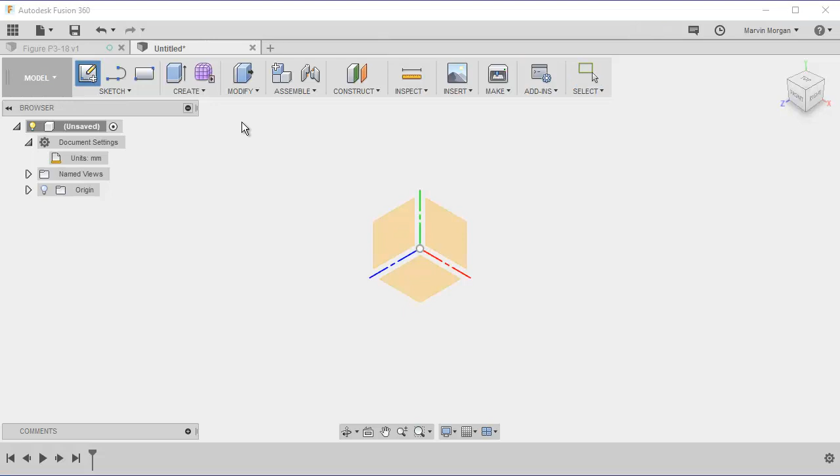Next, we'll begin with the sketch. Our sketch will be on the front face, so I'll click the cube to see the front and select the plane for the front view.

To form this drawing, we're going to begin with a rectangle using the center rectangle option. Our center point will be the origin, and we're going to come out with the box. For the first box to the left, type 60 for the height, hit tab, and do 100 for the width. Hit tab again so both are locked in.

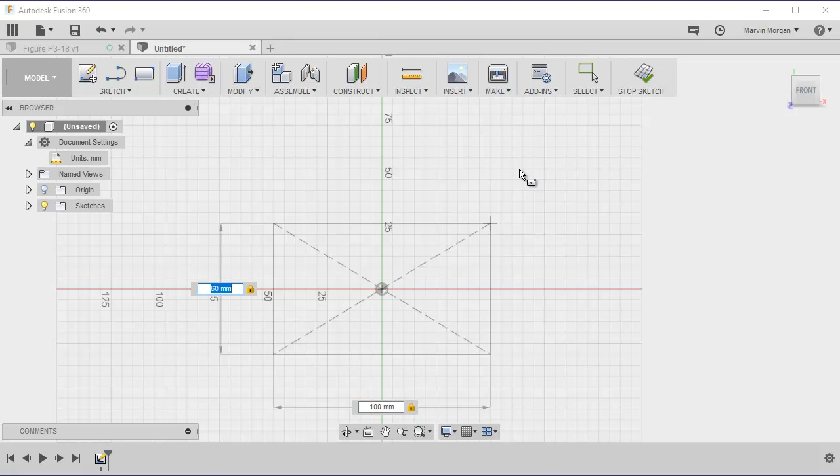I can take my mouse and just click, drawing a line that goes across the image to create that first slope, just like you see in the picture.

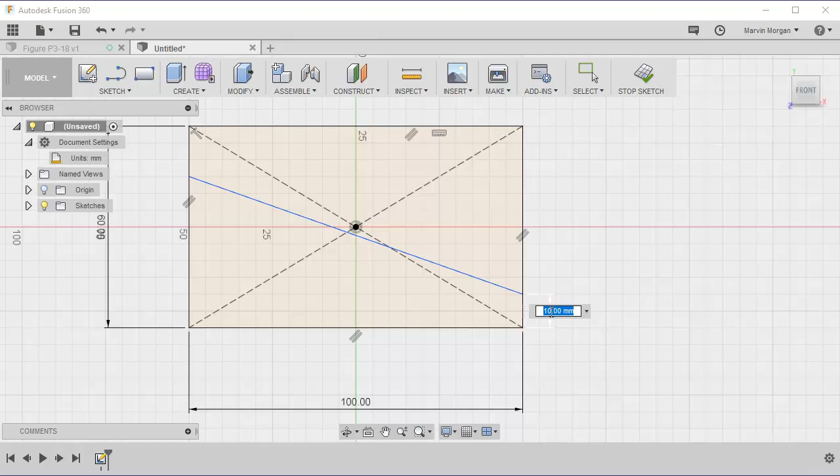Now we're going to use our dimension command to organize this line to make it where it's supposed to be. From this point to the bottom line, it's supposed to be 7 millimeters. Also, this line is supposed to be at 22 degrees from the top line, so I click both lines and put 22 for the angle.

We have another diagonal line that's part of the profile, starting from here and cutting across for the back side. Again, using our dimension, from this particular point to the bottom line is considered to be at 38, and also the line is at 22 degrees as well.

Next, we have 2 circles that we need to apply a point to. I'm going to click on the point and place one point here, and a second point somewhere in that area. Using our dimension command, we'll organize those 2 points.

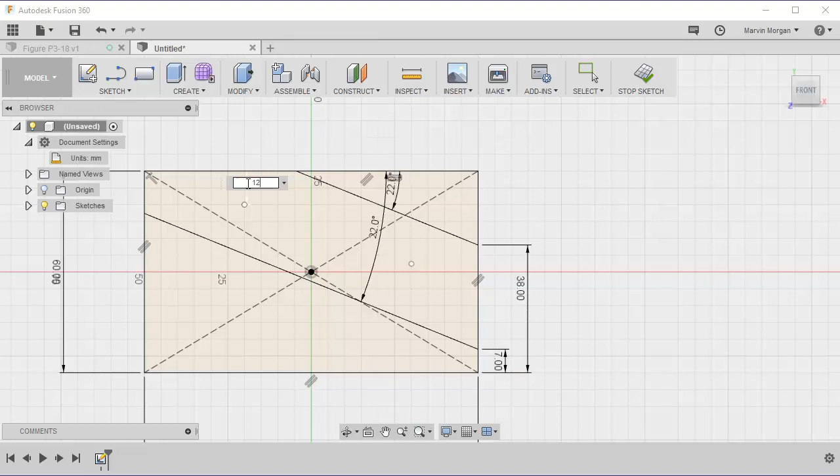From this point to the top line, it is 12 millimeters. From this point to this line here, it is 25 millimeters. This point to this line is considered to be at 30, and this point to the top line is 27.

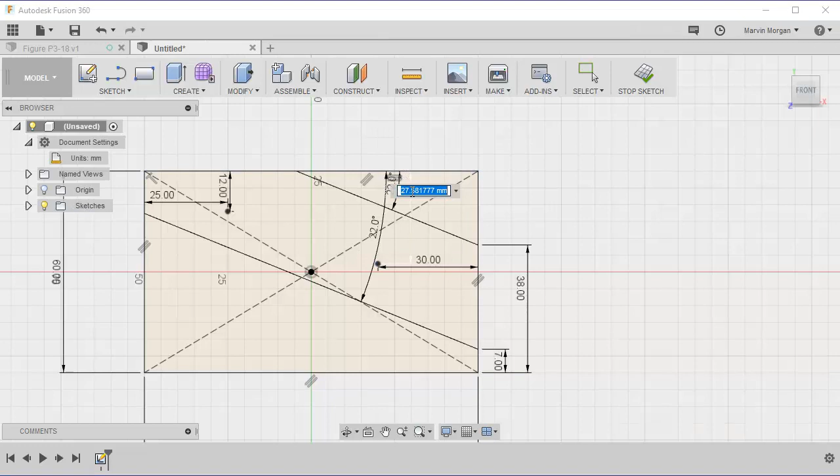At this time, we can do some trimming. So under sketch, we'll go to the trim command, and we're going to get rid of this line and this line.

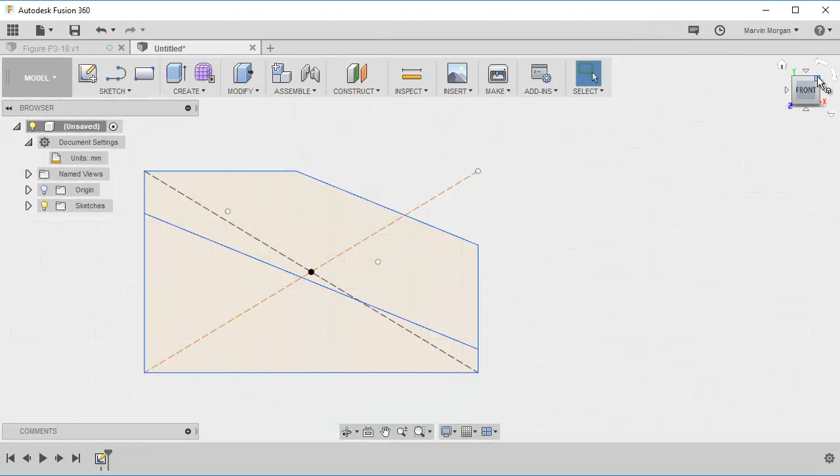At this time, we can go ahead and stop our sketch command and begin bringing this picture to life. So we'll go to our create side and go to extrude. The profile we're going to extrude is this bottom triangular shape, and the distance for this extrude is 15 millimeters. You hit OK.

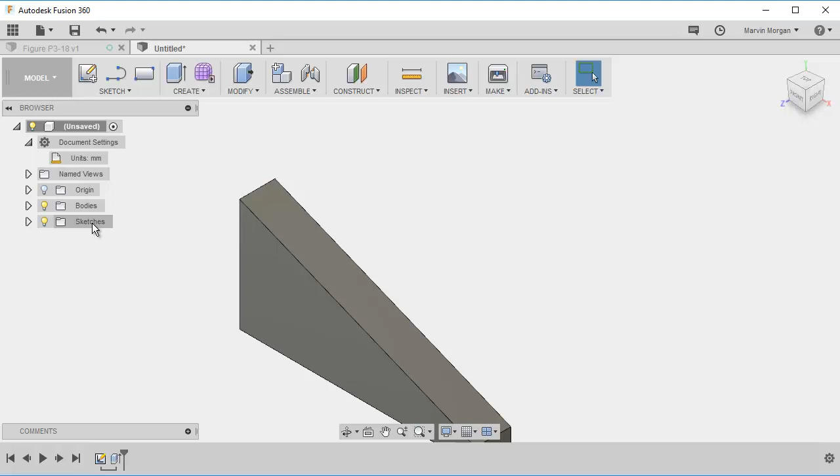Now, our sketch disappeared when we did the extrude, but we need to bring it back. So we're going to go back to where it says sketches, click the down arrow, and turn the light bulb back on for sketch 1.

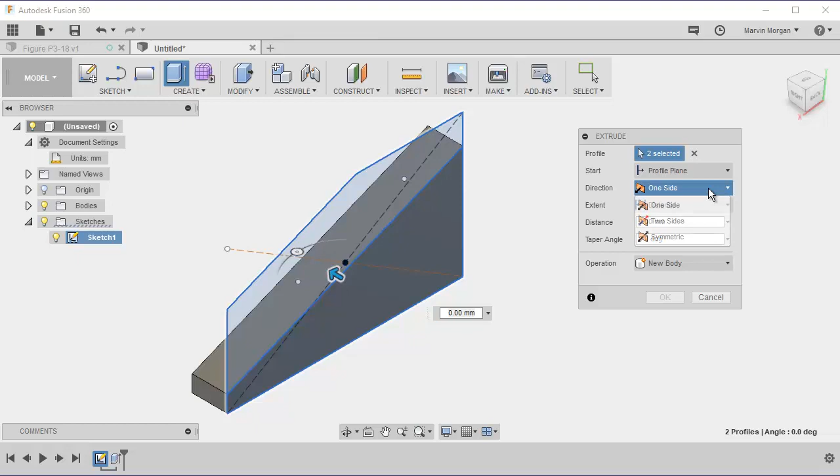At this time, I can flip my cube over to the opposite side and do an extrude on this side. I'll click it, hit both profiles, and make sure that it goes the reverse direction. One side is where it should be going. I need the distance to be 15, but I want to put negative 15 so it goes the opposite direction.

Also, where it says operation, you want it to be joined. You want both of these profiles to be joined together as one solid item.

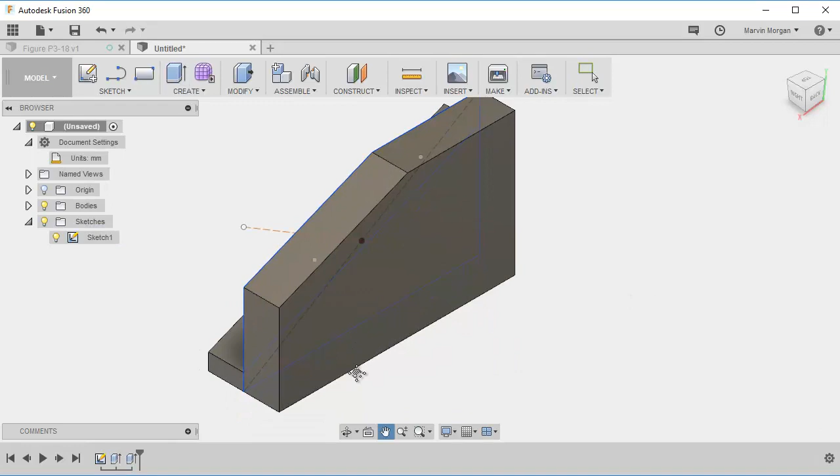Now, going back to the opposite side, we have our 2 points that we created for the holes. So under the create command, you'll see the hole button, and we will select the first hole here. The diameter for the hole is considered to be 14 millimeters.

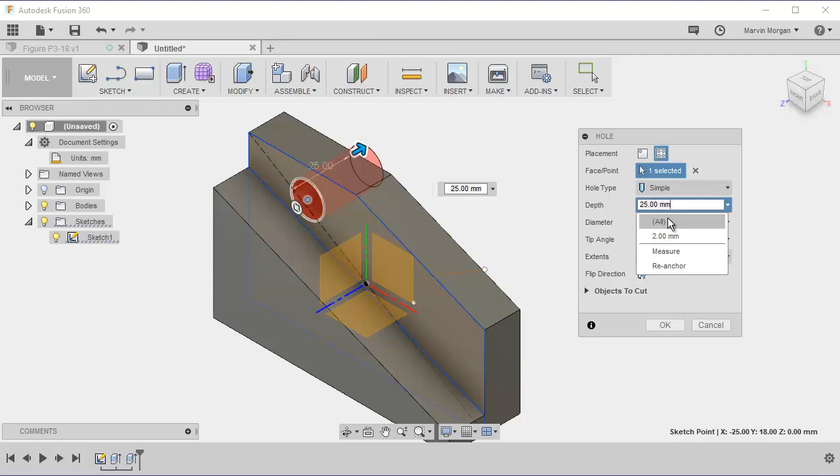The hole should go through the whole entire drawing, so when it comes to the depth, it really doesn't matter—you can just go ahead and do all so that it goes completely through the whole shape. As far as the tip angle, you don't need to worry about that because there's no tip to be seen. You can provide all in this instance as well so it knows to go through the whole shape.

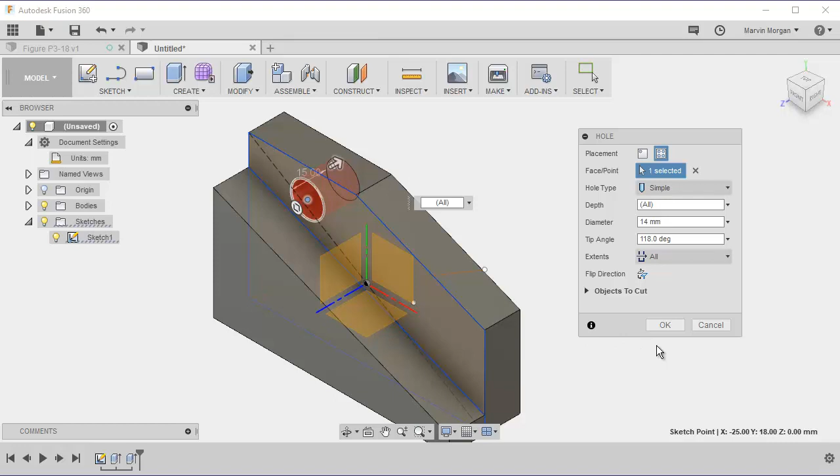You hit OK, and there's your first hole. We go back to that same command, hole.

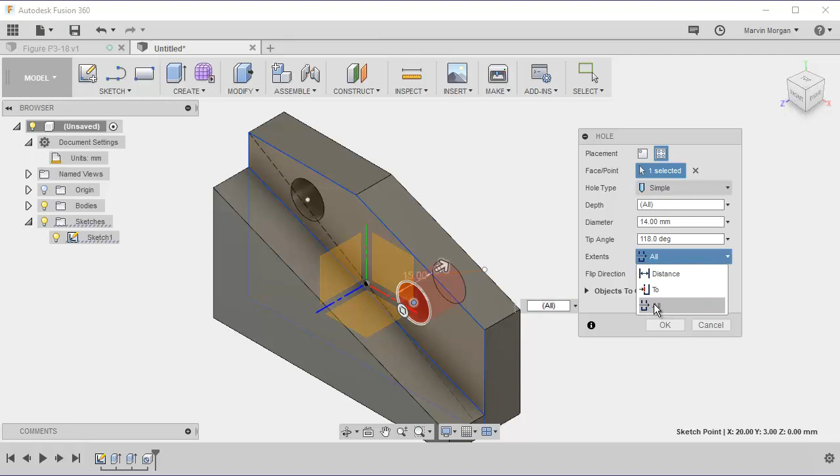We click on the other point for the depth—remember, we wanted to go through the whole entire shape. The diameter is 14, and again, we don't have to worry about a tip angle. Lastly, we want to go through the whole entire shape. We'll hit OK, and there's that hole.

You still have your sketch visible, so in this case, we can turn the light bulb off for the sketch, and we now have a complete project. This completes this drawing.